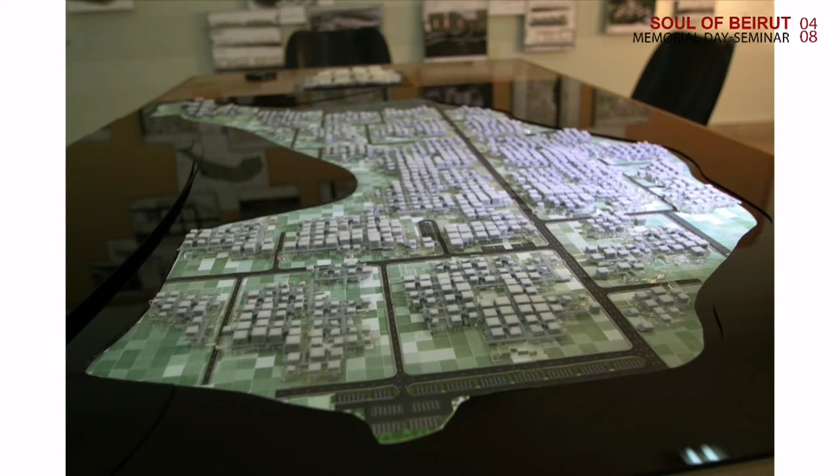Six years ago, when I looked like a baby, I graduated from the senior project that I carried out as the project of a lifetime, since it was so real by the time we were facing the Syrian refugee crisis that I so wanted it to be built. It was the catalyst that woke my awareness about the real meaning of architecture—that it's not about the physical object. Architecture is about human aspiration and the adaptive response to a need, in a way that the role of an architect is to be able to adapt a selfless architecture to any situation.

And it's so powerful that its impact has the ability to manifest itself to make a radical change. And of course, it has to be for everyone, for every single human being, and not just for rich people who actually have enough money to make great buildings. So time made me realize and taught me that this project isn't supposed to be tailored only for the refugees, because we live in a world that has never found peace ever since the history of mankind.

Humanity often faces incidents that disrupt lives, whether caused by natural disasters such as tsunamis, earthquakes, floods, etc., or man-made, such as war or refugee crises.

So one year ago, this is what happened to the port of Beirut. It disrupted the lives of many Lebanese people, and as a result, a total of 200,000 homes were affected by the blast, in which 3,000 were severely damaged. Also, 300,000 people were made homeless.

Some poor families literally had no place to stay. They were living in really bad conditions, and they didn't have access to the simplest aspects, much like what is needed for animals, and even less. Also, landlords who rented their homes using the old wage system have completely misplaced their tenants, as new wages are to be enforced upon restoration.

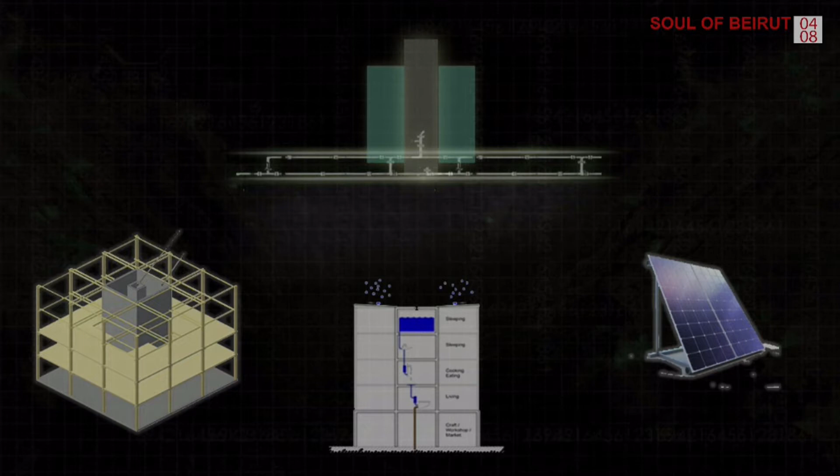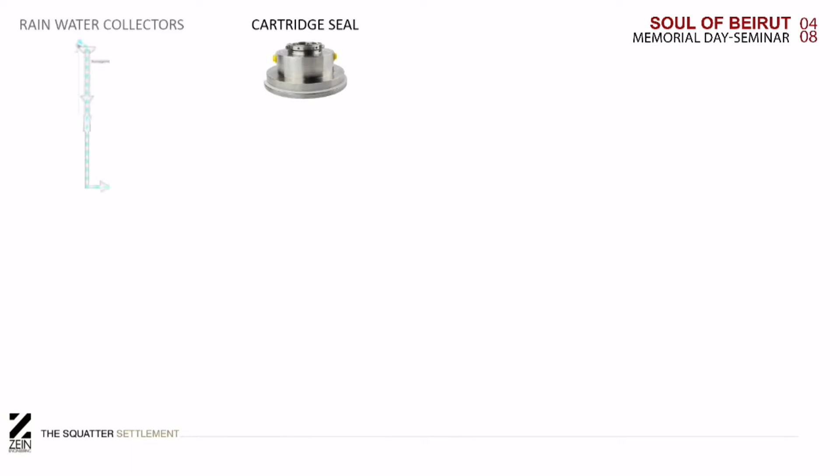So the core is the main shaft that contains all the services that the end user needs to create a self-sufficient settlement using natural energy resources. For instance, electricity is powered using PV panels alongside a small generator for backup. We're going to need a small cartridge seal, a rainwater collector to collect water from gravity, a water tank, a PRP, and of course, for the overall system, we need a treatment system.

So rainwater is collected by gravity and pumped up to the water tank and stored in a 10,000 liter water tank, then pumped back to the units, clean and drinkable. And of course, the cartridge will purify and clean the water.

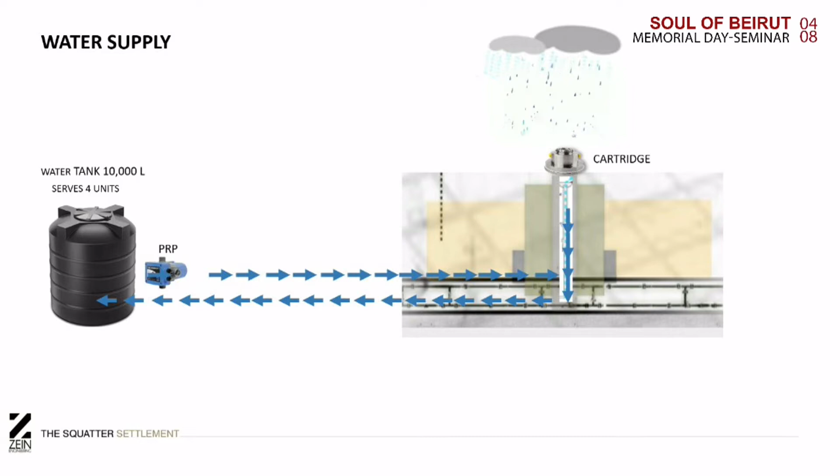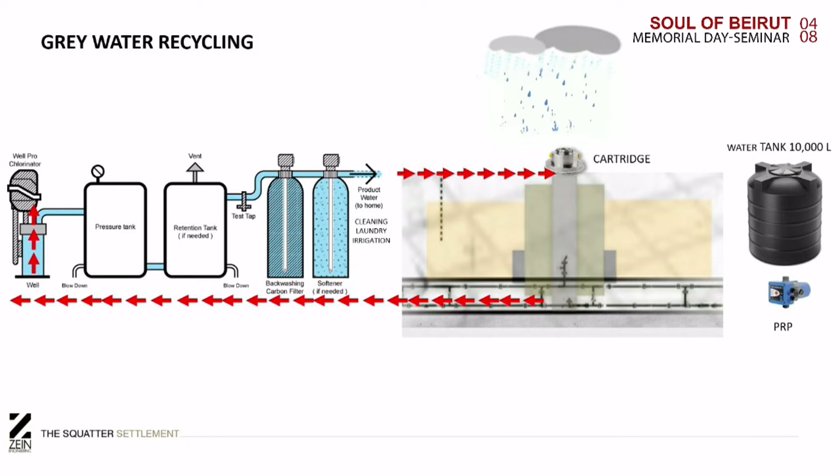Although sewage is constantly being recycled using an external treatment plant common for each couple of units, gray water makes its treatment cycle to become reusable for toilet water, for irrigation, for cleaning water, maybe laundry.

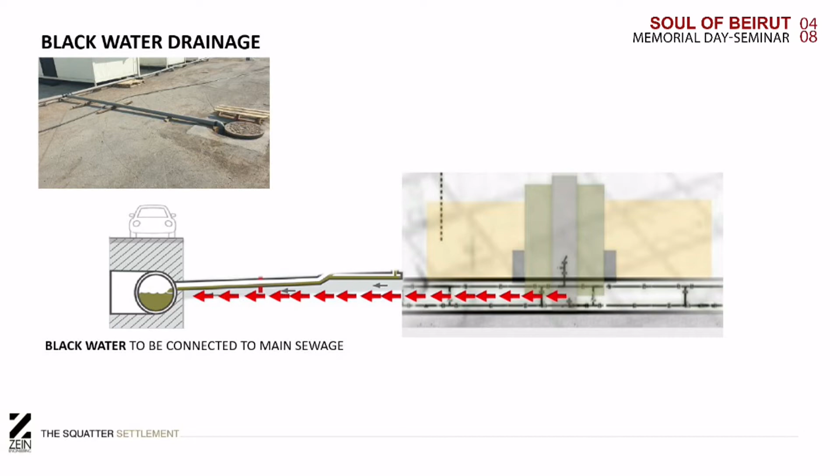As for the black water, it's either drained to an already existing sewage system, or if we don't find any existing sewage system, we can use a black tank where we can store and treat the black water. But of course, we have to regularly clean it.

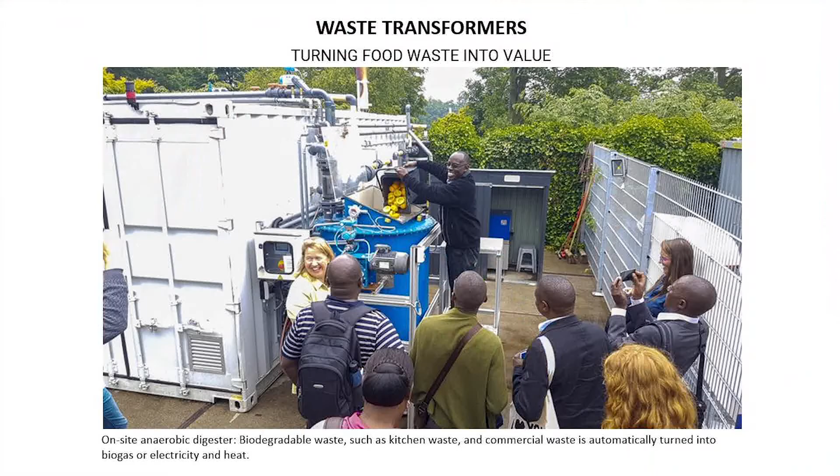And we have this on-site anaerobic digester that serves the whole settlement, so biodegradable waste and commercial waste is automatically turned into biogas, electricity, heat, and also fertilizer.

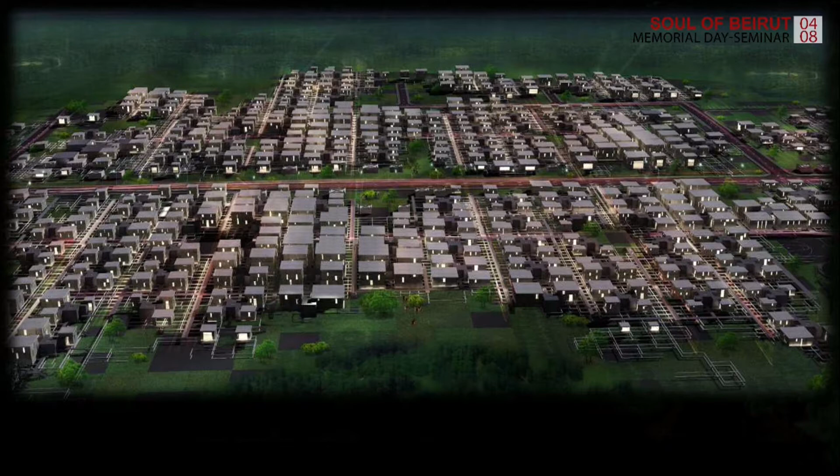And this system can be built anywhere in the world by adapting to its context. But of course, it also has some sort of aesthetical value here.

In Beirut, after the explosion, there was this voice in my head telling me that I should build this project for the people of Beirut who became homeless in their own country.

So first we had to identify the implementation area. The project must not be so far away from their neighborhoods, from their homes, so they can maintain their regular life and social functions.

And we targeted 3 types of family victims. First, we had the families that had their houses completely destroyed and unrepairable, and they needed a new place to stay permanently.

Some other families had their homes partially destroyed, and they're repairable, but they need a year or a couple of months to be repaired. So they needed a place to stay temporarily until they get back to their new homes after being fixed.

And third, we had families that were living under old lease systems, and they got ousted by their landlords, so they need a place to stay permanently.

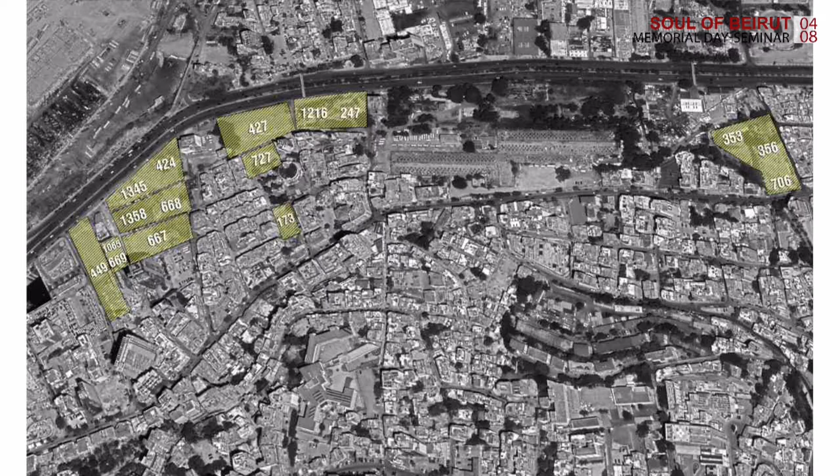So we identified the empty lands in the affected zone. These were privately owned, so it was really impossible for us to use them, as they're so expensive. Then we found a really interesting land owned by the municipality. I became really friends with them, but they didn't give me the land, so it's still stuck there, permanently.

So we built 16 houses that were supposed to fit inside a 2,000 square meter land, and we compacted it to fit inside a 1,600 square meter land. This project can reach 2-story levels, so instead of having 16 families, we can have 32 families inside that 1,600 square meter land.

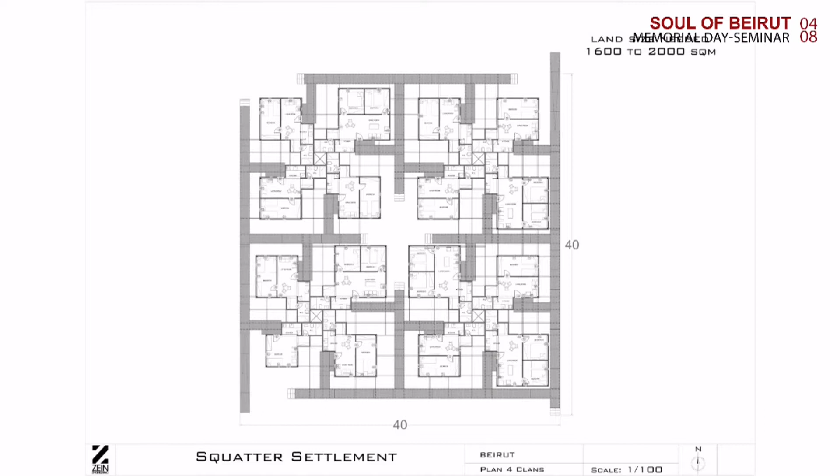Of course, the project can be dismantled in a matter of days, and the land will get back to its original state. So we did some executional drawings for the project.

As you can see here, we have different clans. Here we have open space, bedroom with the living room. Here we have partitions, with 1 bedroom, living and dining. Here we have 2 bedrooms, and of course we can reach 3 bedrooms.

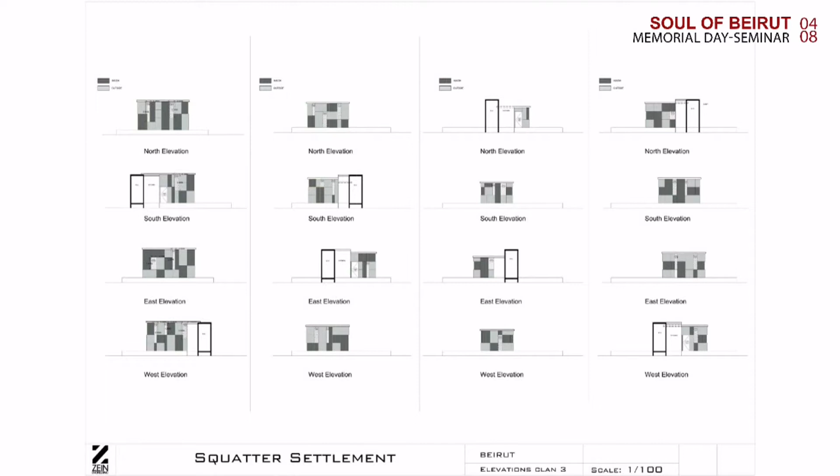There's this ideology that says living in a shelter is like living in a cottage, or something really ugly. So we designed the facade in a way to appear really elegant and attractive in its design, so people can live in beautiful architecture.

Essentially, the architecture is encoded in a way to be assembled and dismantled in a matter of days, so it does not really require much manpower.

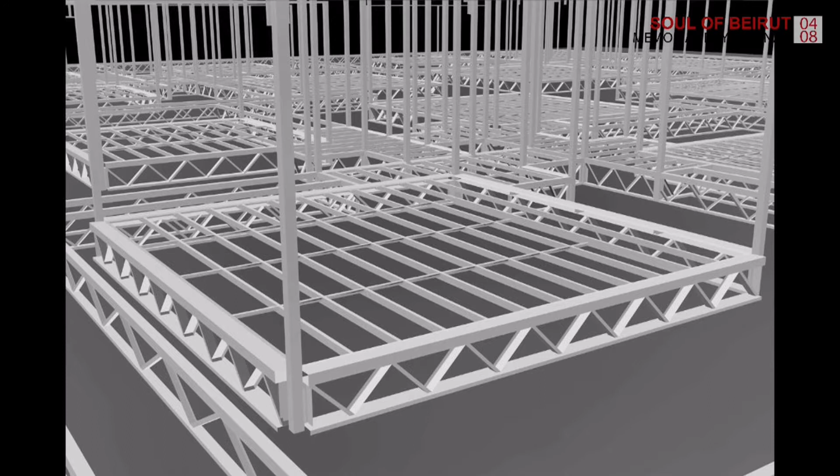These steel structures are lightweight, and the civil engineers designed them so that by connecting all these elements together, we come up with a robust and strong structure. We also uplifted the whole structure to make sure the infrastructure is preserved, and to protect the shelters from flooding as well.

As you can see here, we reserved tracks for the walls, the doors, and the windows. It's all encoded in a way that you build it like a puzzle. So this is the overall structure.

As you can see, we have catwalks. We need catwalks to arrive at their house. And as for the walls...

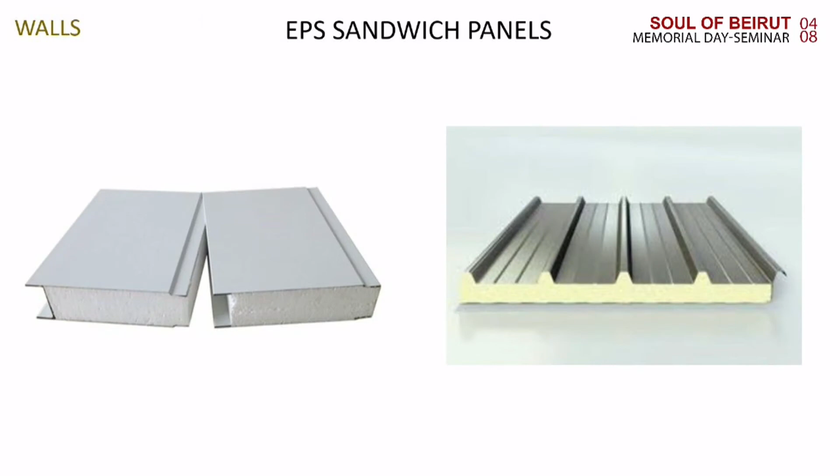As for the walls, we use these sandwich panels. These ones are used for the walls, and the right one here is used for the roof. What's really interesting about this material is that it's lightweighted, insulates perfectly, and it's cheap. It's an amazing material.

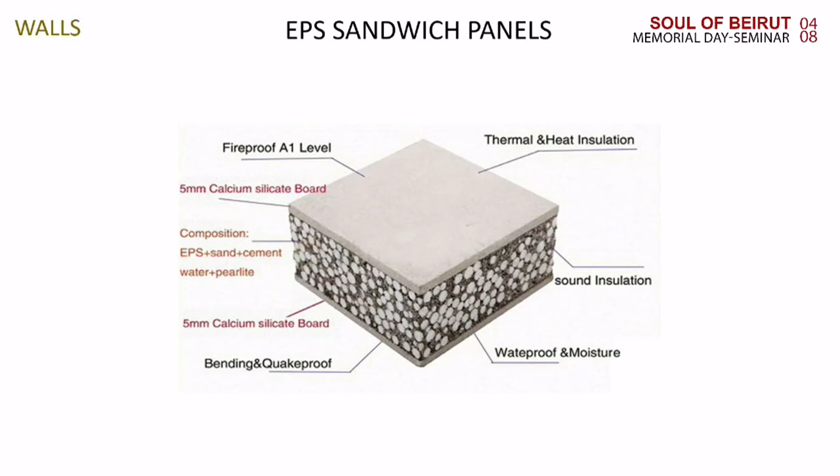And we used for the flooring, bamboo flooring and vinyl, since it's safe, durable, and eco-friendly. And for the furniture, we used reinforced paper panels.

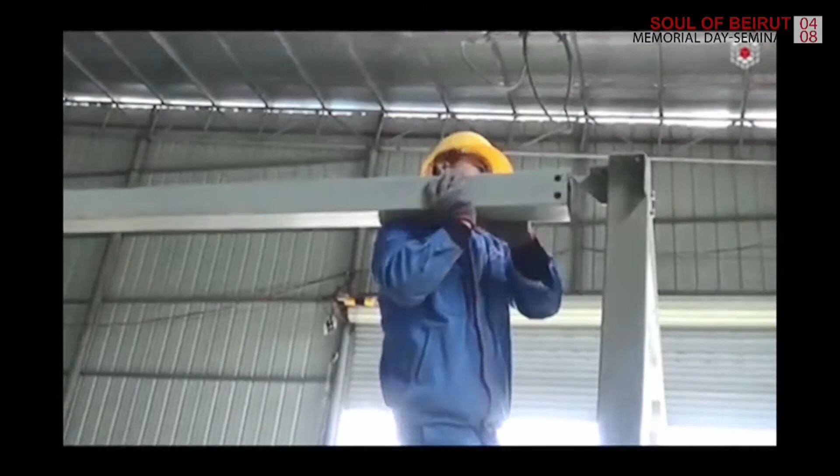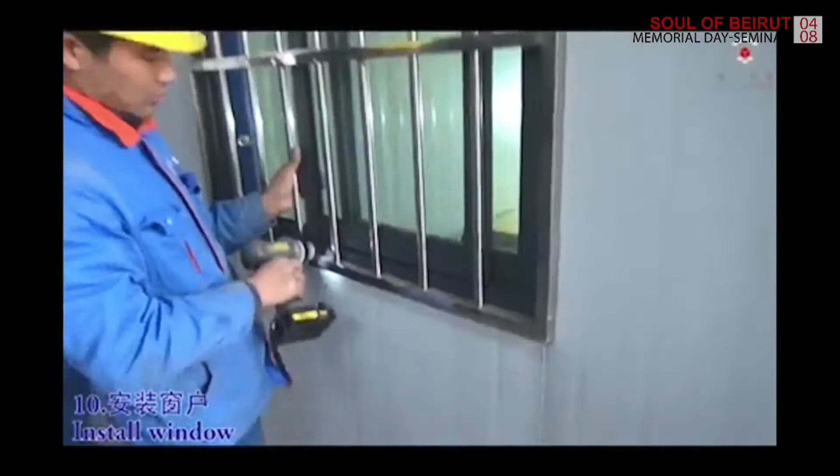So we need some tools and accessories and some bolts. By connecting all these elements together, we have the columns, the beams, and a place reserved for doors, and windows. We have the protections of the windows and the walls, and we need the roof, bamboo flooring, and of course some silicone and small materials, some tools.

There's this important phenomenon called schooling. This is where people learn easy techniques in a socially active manner. There will be corps of trained builders that will train others, and then the system will spread.

In the case of any emergency, like the one that happened a year ago, any person who learns this technique can build his own shelter. So it's a permanent temporality instead of a temporal permanence. People can stay in a temporal system permanently. They can be dismantled in a matter of days.

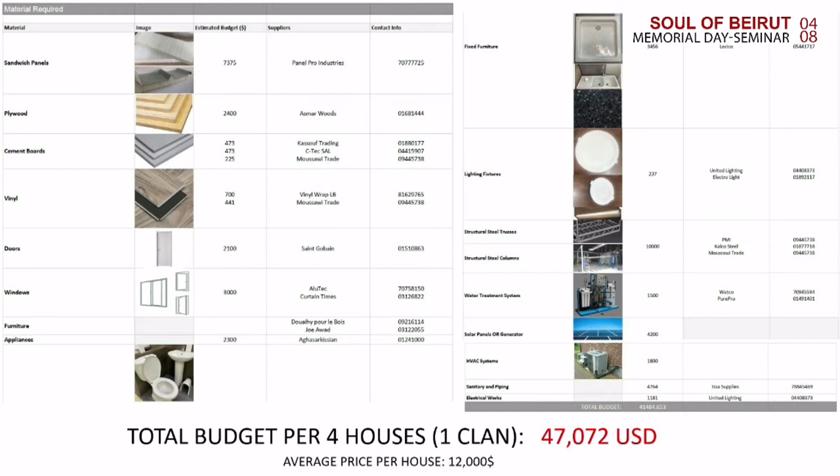We made an accurate BOQ. We stacked all the materials needed for this project, and it turned out that the budget per 4 houses will cost $47,000. So the average price per house is $12,000, which is negligible compared to how much a damaged house will cost and how much time it will take.

Some houses require a year or a year and a half to be repaired. So these people are staying a year and a half precarious. They have no place to stay. They don't have any home. That's why this project is needed.

What's really surprising is that it's not over. One year after the explosion, there are still families that are homeless, and they have no place to stay. This project is needed, it's a must.

So it's a permanent cycle. You might say $12,000 per house, but it's a one-time payment for a system that will be used enduringly. Whenever a crisis happens like this one, people squat the settlement as settlement squatters. When the crisis is over, they either stay permanently in the house, or they can dismantle it and store it so it can be reused again for another emergency. It's a never-ending cycle.

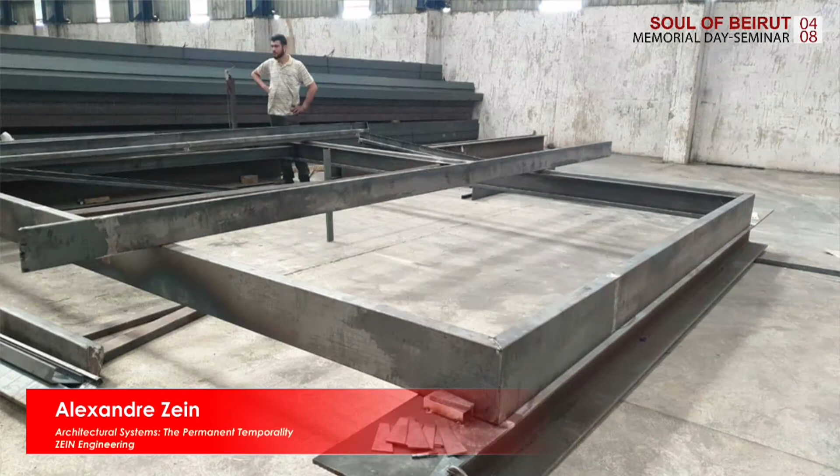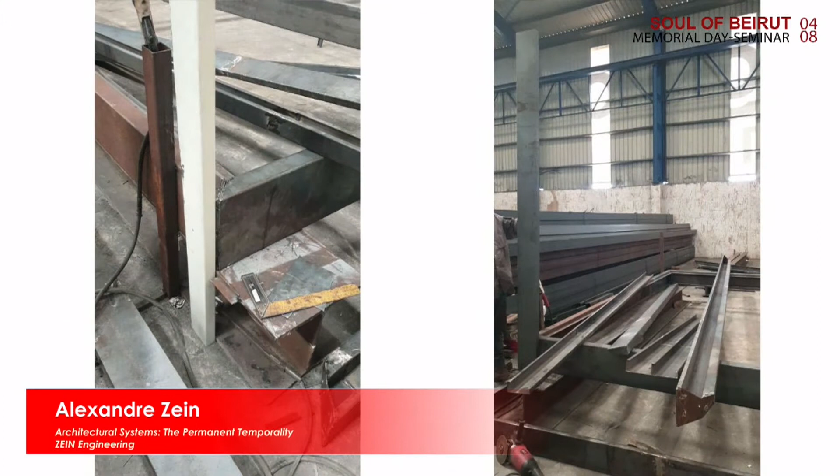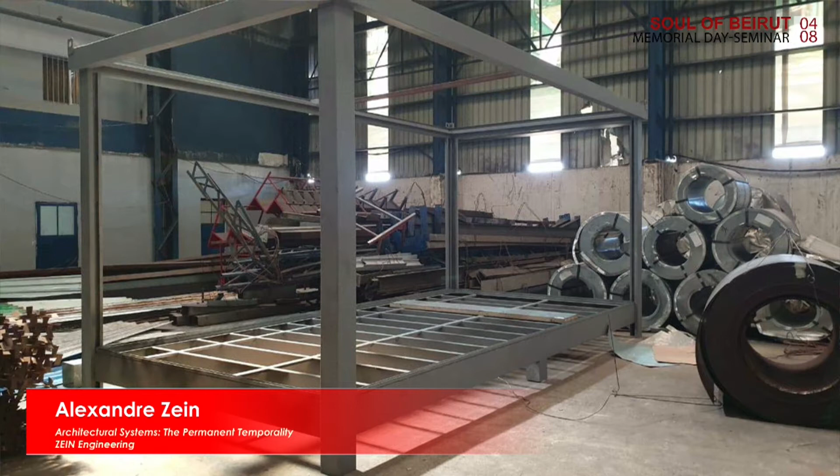Six years ago, I really wanted this project to be built, but I was a baby. A year ago, the explosion happened, and I felt the urge to build this project, but we didn't have the time, the money, the place, or this much support. It was short time. Well today, one year and one week after the explosion, we did it, and we built it, and it's right here in front of you.

But of course, it's not over. We're still redesigning, still working on the testing. It's still an ongoing process. This is just the beginning of the project of a lifetime.

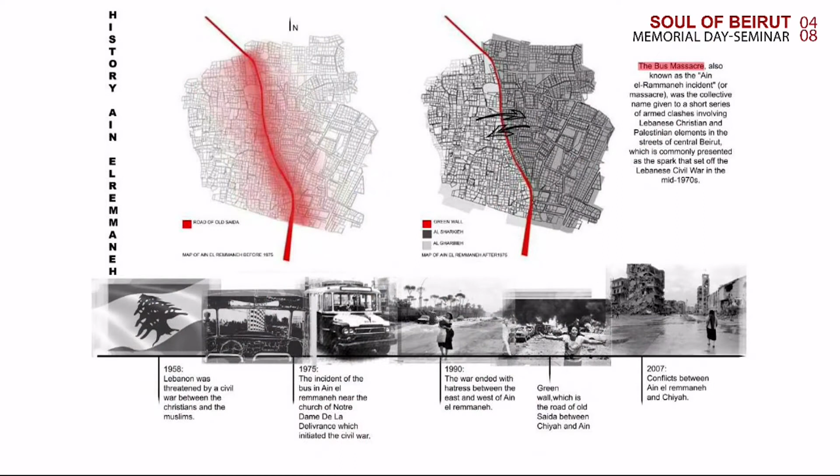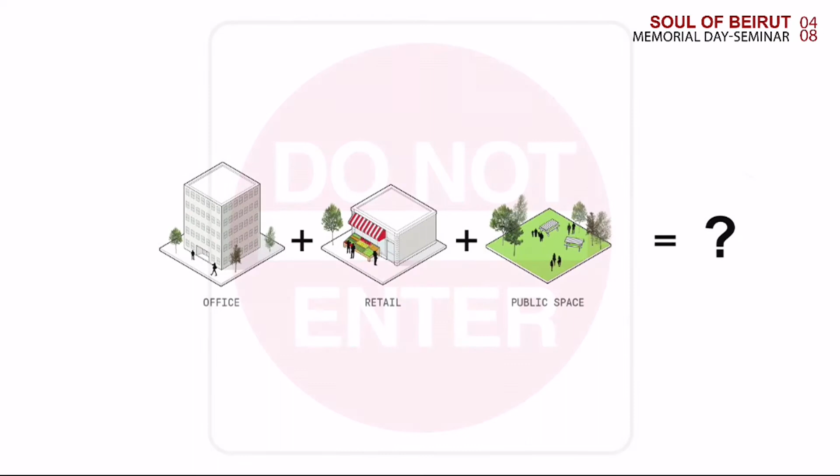So the area has nearly 2% greenery and a very high level of pollution, no public attraction, no public space. So this is the land here. And usually in Lebanon, private space always remained too private. So that's why we miraculously convinced the client to create some sort of public attraction by introducing retails and coffee shops on the ground floor and some offices on the first floor.

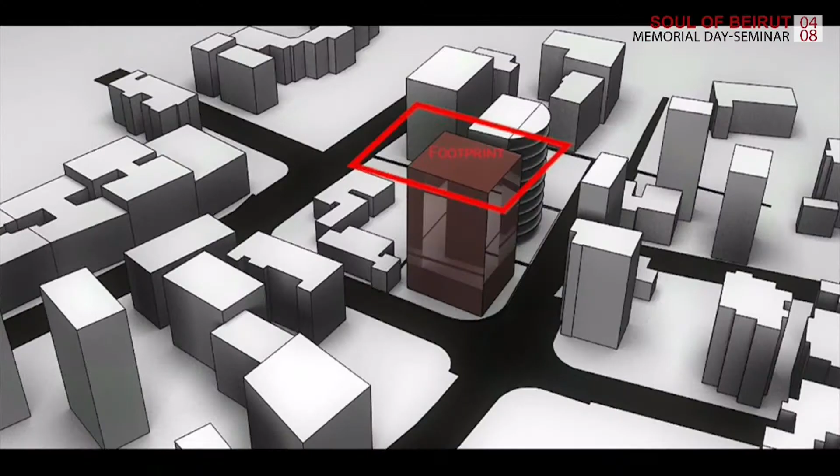So instead of taking the maximum footprint like all the investors do to fit as many apartments as they can, we brought the footprint to the minimum and went higher. By going higher, you can enjoy the amazing views of Beirut, and of course you can reserve a place for public attraction down here.

And then in order for us to retrospect the old unfinished structures of the area, we brought all the structural elements to the extremity to be part of the architectural design. Then in order to neutralize the exceeded exploitation, we subtracted parts of the nude slab to become part of the emotional facade.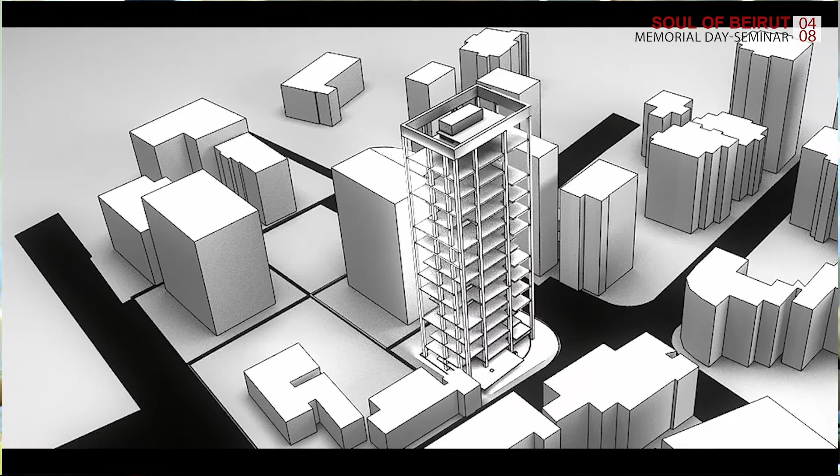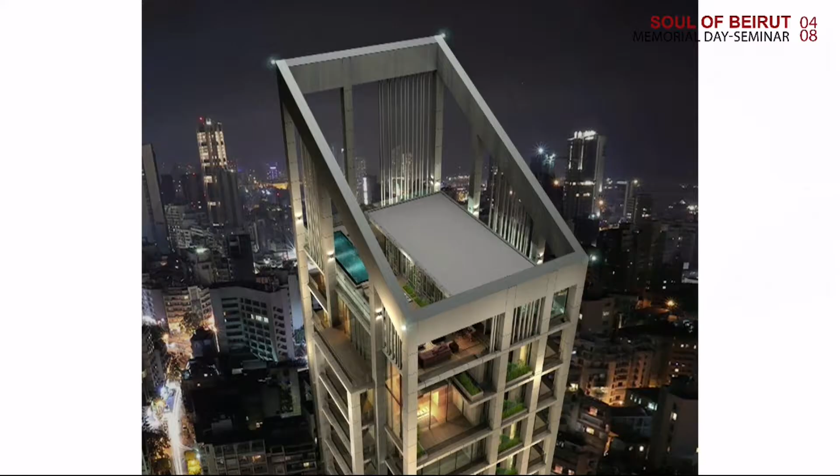And we planted it with micro algae so it could absorb the carbon. Then we uplifted and deviated the whole structure so it could remind us of the resilience of Ain El Mreisseh. So a simple rational building has greenery that surpasses 2% of the area, and it imposes itself as an inspiring landmark element that brings positivity to the context.

So we clad the structures with ACP panels so we can give it a strong character that would remind us of the period of our time. Then we recessed all the glazing system in a way that during summer, these nude slabs act as shading devices, while during winter, the sun can warm up the entire apartment.

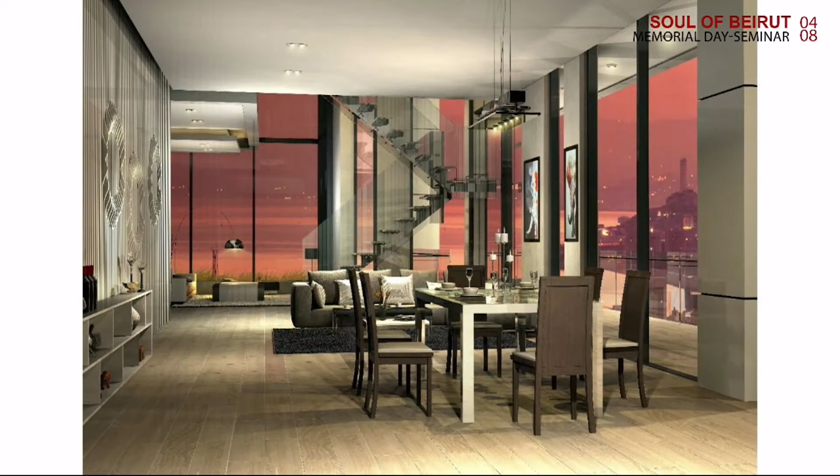So here you can see the connections from the inside of the apartment to the sea. You see how beautiful the Mediterranean Sea and Beirut are.

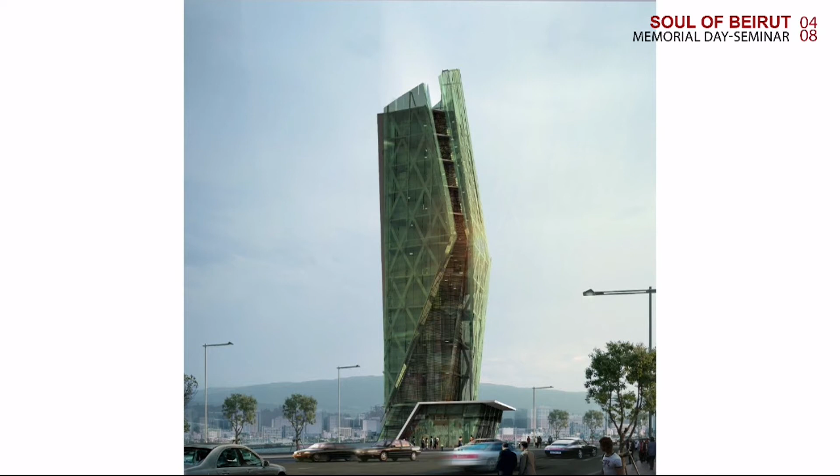Yet another project in Beirut, in Jdeideh - it was a client who wanted a glass tower. So it infused the street with a muscular skeleton element that is fighting gravity, and of course it has a dynamism around the street. There are double levels for the skin.

And then we have this bracing structure that is holding the whole structure. It hosts more than 100 offices and companies, and they all overlook the amazing silhouette of Beirut and the sea.

Well, from Beirut to the world, we're going to talk about some international projects. So we recently won the competition to design a residential complex for Renko, and we also obtained the most creative award for Land Complex. It was located in Riyadh, KSA, in a very high-end neighborhood on King Abdullah Street. So this is the land, 9,750 square meters.

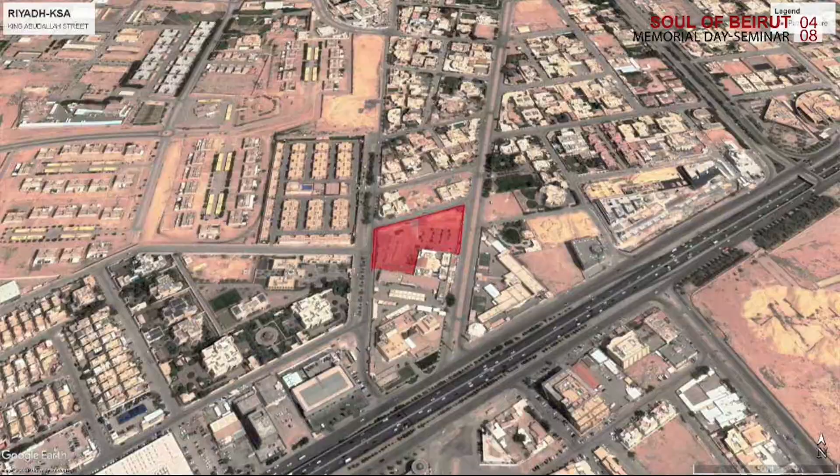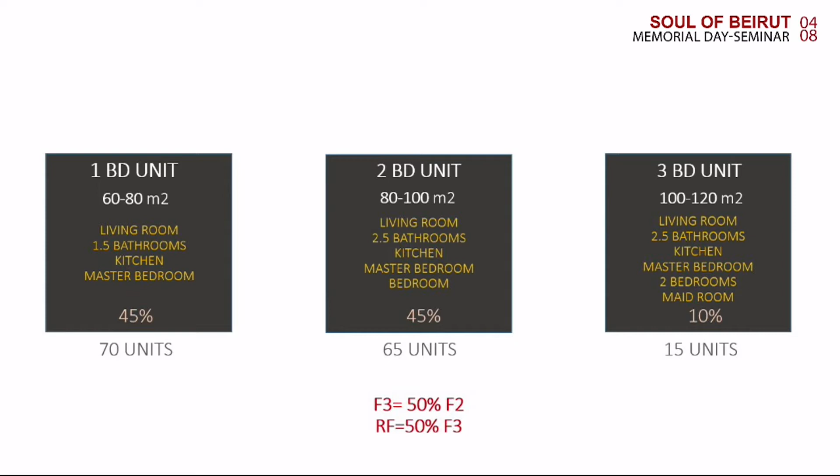So the challenge was to create a residential complex that maximizes the use of outdoor spaces in an area that avoids sun exposure, so the design is flexible in adaptive response to its context. The assignment was to design 150 apartments split into 3 types: 70 units for the 1-bedroom type, 65 units for the 2-bedroom type, and 15 units for the 3-bedroom type. And the regulation was roof shall be 50% of the third floor, and the third floor shall be 50% of the second.

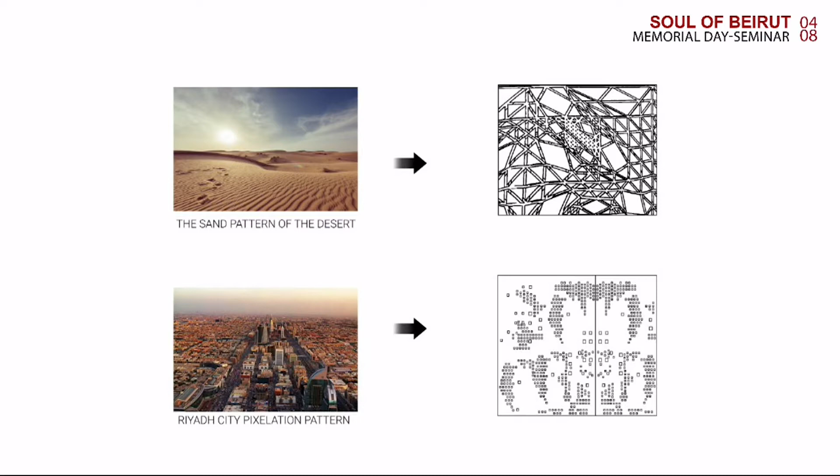So first we had to identify the DNA of the project. We got inspired by the sand pattern of the desert of KSA to create the main skin shield pattern here that will protect the overall project.

And then here we got inspired from Riyadh City's pixelation pattern, and we created this perforated skin shield for the apartments that will protect them from the intense sun rays and foster privacy among families. Then we simulated many forms, many pixelations that could be used for these apartments.

So the iteration of apartments acquires the same essential ingredients to create a superior protected living experience. Each unit acts as an organic cell that transforms its morphology according to tenants' needs, synchronizing with real-time environments. So we created all the types that we needed so we can just expand them.

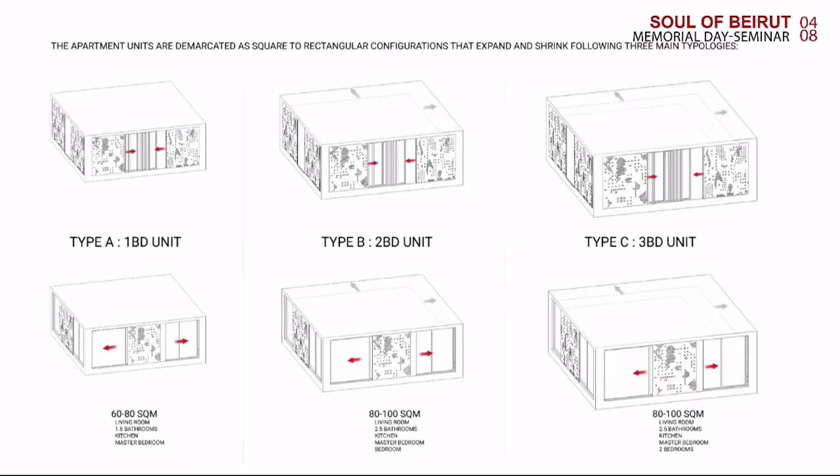So this perforated sliding skin shield transforms its location according to its orientation, almost like a nervous system that links between two otherwise separate environments. First, emanating from a modular grid, we created an infinity loop that reminds us of the infinity of the desert. And then we uplifted the southern side so we can protect the overall project.

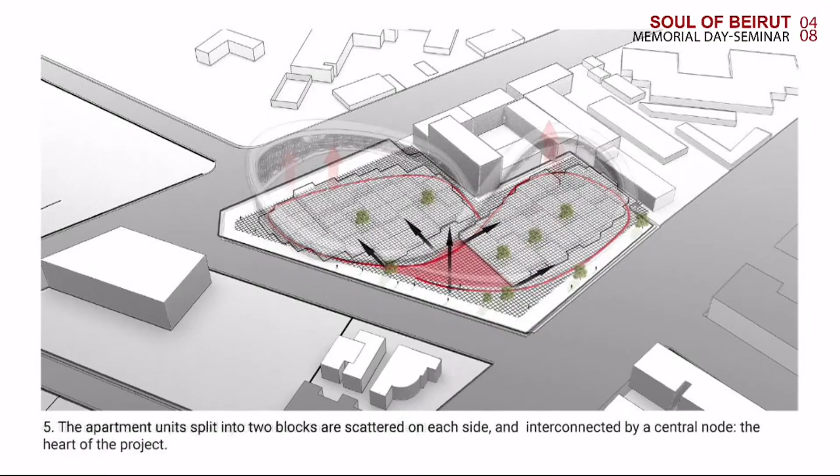So the southern side is the skin shield that reminds us of the desert of KSA. And then the intersection was reserved that will connect the overall project together, the private and the common spaces.

And then in the ground floor, we took the maximum footprint. We needed to fit as much apartments in the ground floor as possible. And then we created some courtyards, like 8 by 8, to make sure that every apartment will receive enough daylight. And then, of course, we change with the heights.

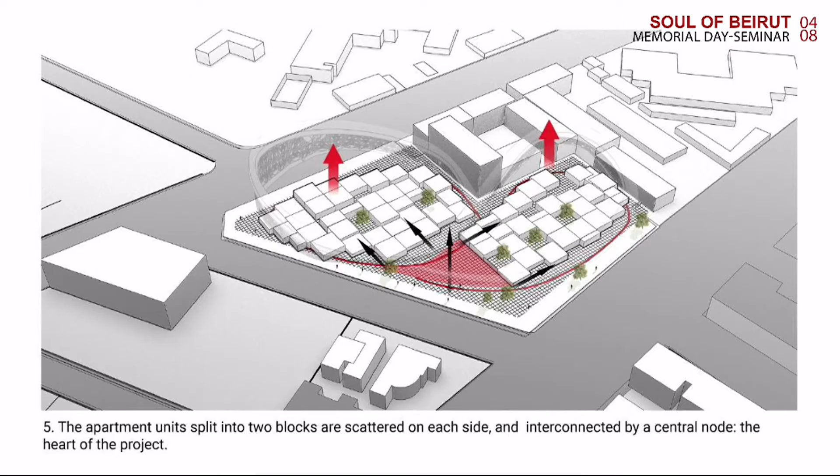And then by mingling all these apartments together, it cascades up to reach 150 apartments. And they all enjoy the amazing views of Riyadh. And each apartment has its own garden.

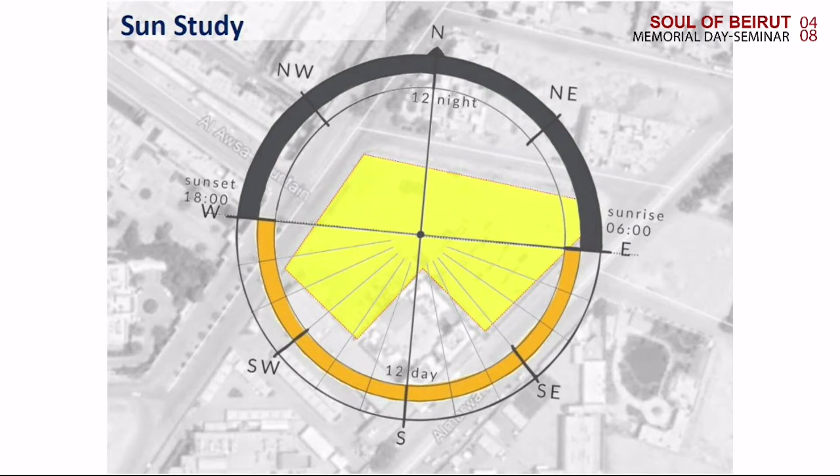So we had to study the sun path to make sure that the skin shield will perfectly protect all the apartments. And then this cascading movement will cast shades directly to the gardens in a way that people can, during all times of the day, spend time outside in the shades.

And then, as you know, in Riyadh, sometimes the wind is sandy. So that's why this skin shield distills and filters the sandy wind, and we ensured a natural ventilation.

And as you can see in the node here, we connect the overall spaces. So we have the private, and you have the recreational and common spaces. And then we designed the corridors to be dynamic instead of being just linear.

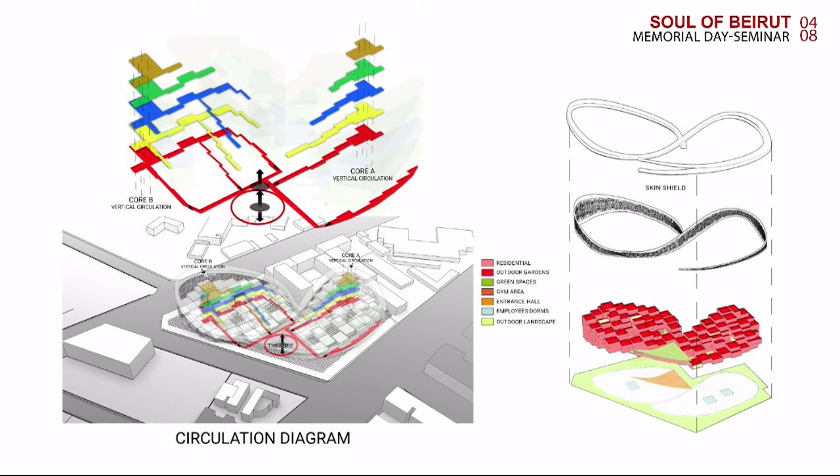This is the city. And of course, we planted all the apartments that all have gardens. And you can see the infinity shape. And of course, the main skin shield that gives the desert pattern.

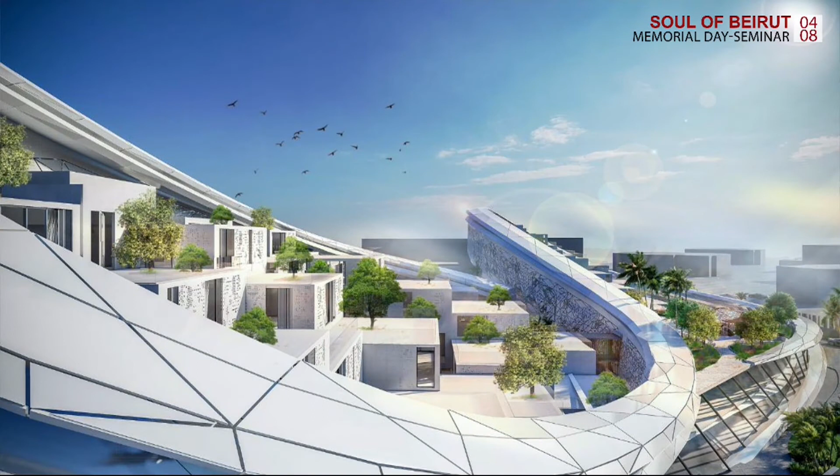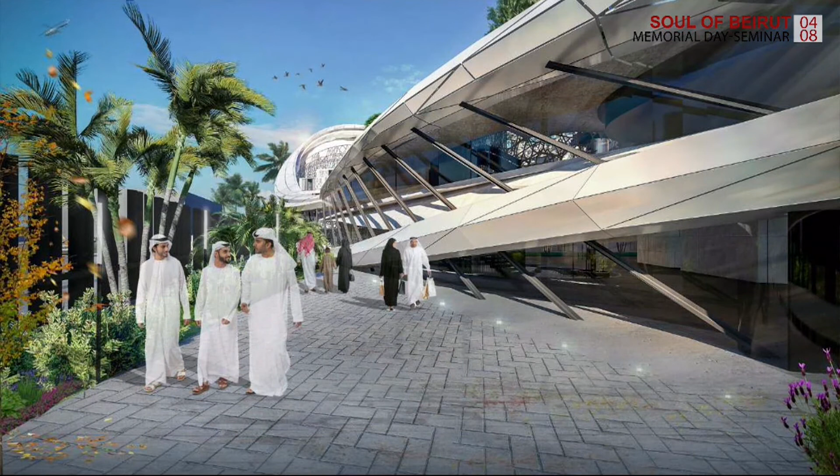And here we have the common spaces where people can meet and swim and spend some time outside, overlooking the mingled apartments. And of course, in the ground floor, we have the recreational spaces where people can walk and spend some time there.

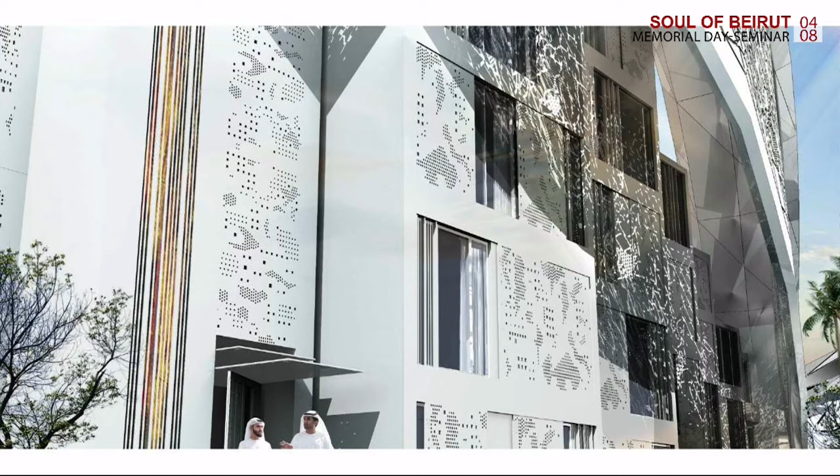And here you can see how the skin shield casts shades within the apartments in a way that gives it this image of a desert.

So in the basements, we had the parkings. In the basement one, we had all the recreational areas in the courtyards. So we had spa, we had pool, we had kindergarten, we had theaters, and many more.

In the ground floor, we had the lobby in the middle, and here you can see that dynamic corridors and the courtyards. So this is the lobby.

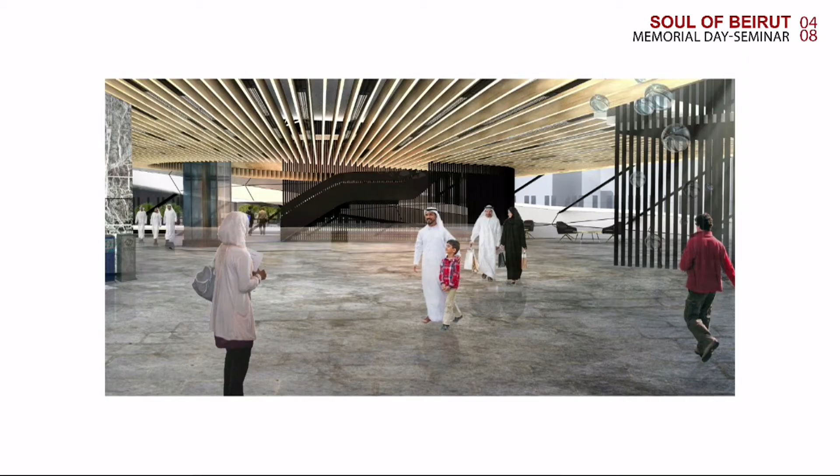And here on the first floor, we created the gym in a way that you're sitting in your apartment, you walk 10 steps, you'll be at the gym. And same for the sky garden created here in the main connections. And then it cascades up to reach 150 apartments.

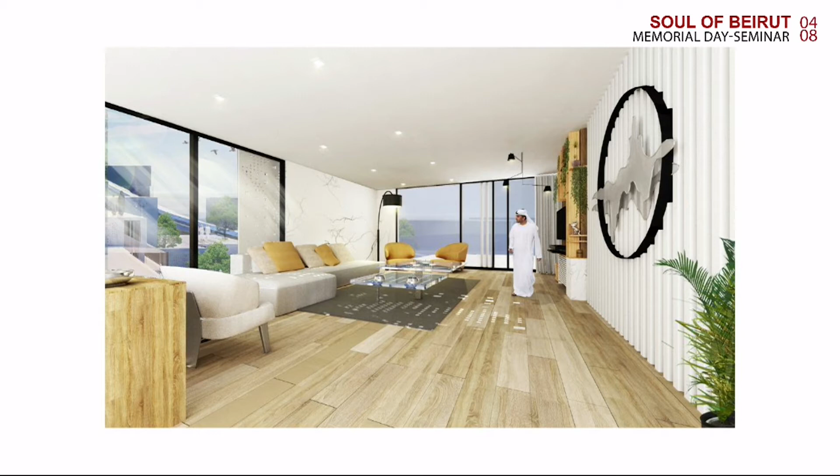So the end user has the flexibility and liberty to open and close these panels during all times of the day. So we can have faultless transparency during sun absence, or we can have considerable isolation during sun presence.

And when the sun is present, it casts shades within the apartment in a very dynamic way, as you can see here. So these were the sections.

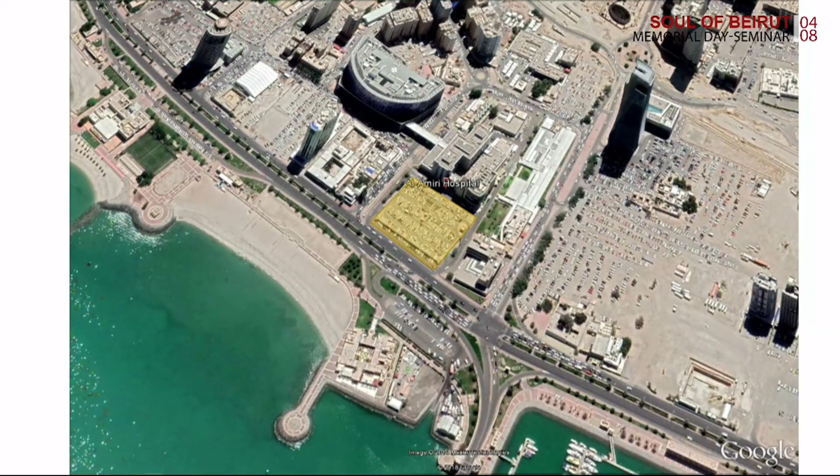Moving from KSA to Kuwait, this is another competition we won in Kuwait City. It was located in an old parking lot that once used to be a government hospital called Al Amiri Hospital. It was torn down in the 1970s.

So the aim was to revitalize the place that once used to be a public destination for medical services. So we were asked to create a greenhouse on its top without mislaying its actual function, which is the parking lot.

So we thought that instead of keeping the same structure as it is and trying to establish a public destination that does not actually blend with the parking lot, we brought all the structural elements of the parking to the underground, leaving the ground level freely open to the vibrant city in a way that the greenhouse and the public will be mixed together under one canopy.

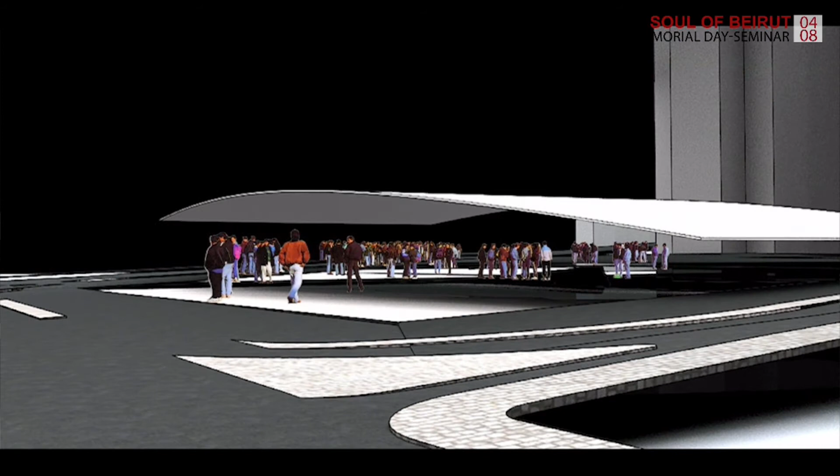So in that sense, a microclimate shall be created inside these spaces that are leveraging the connections to the city. So we got inspired from a plant cell.

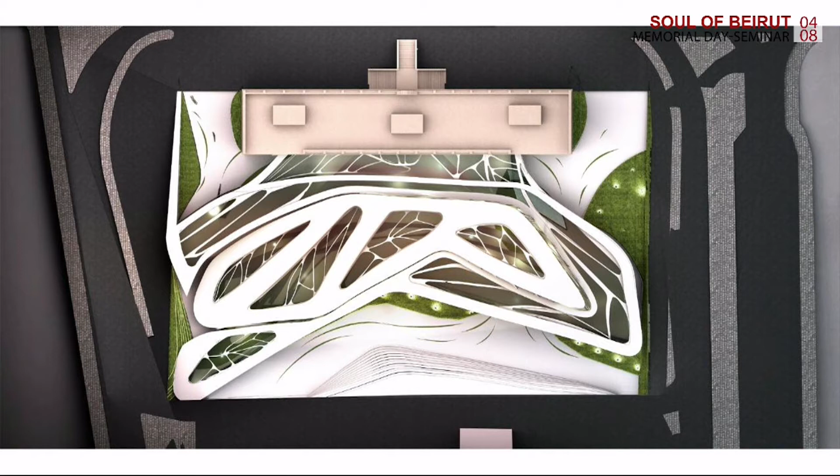So the future projects itself from the old arches, creating some sort of contrast between the old and the new. And the perforated canopy creates shades to the pedestrian from one hand and direct sun to the plants from another. So we didn't use glass, of course.

We used high-strength polymer, ETFE, which is 1% the weight of double glazing. So this material adapts well and perfectly to the high temperatures of Kuwait. So this is the project.

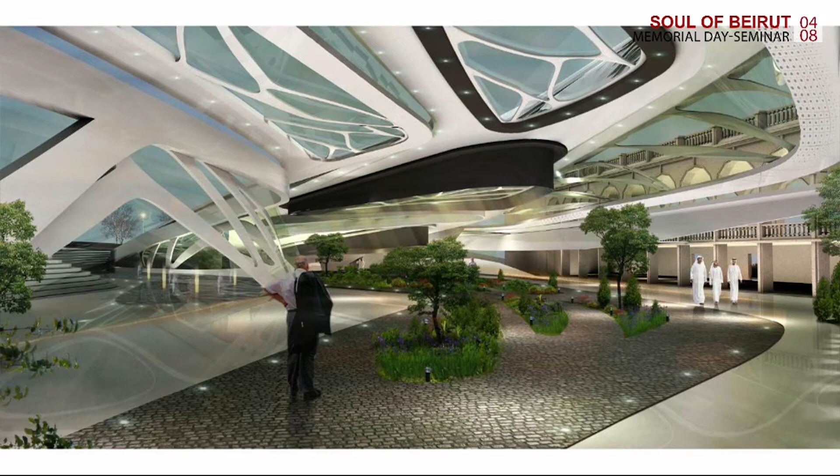So the metabolism of the project provides the end user with a natural microenvironment and delicate spaces, in a way that people can meet and walk and sit amidst thousands of trees and plants, and they're going to be healthy, happy, and comfortable.

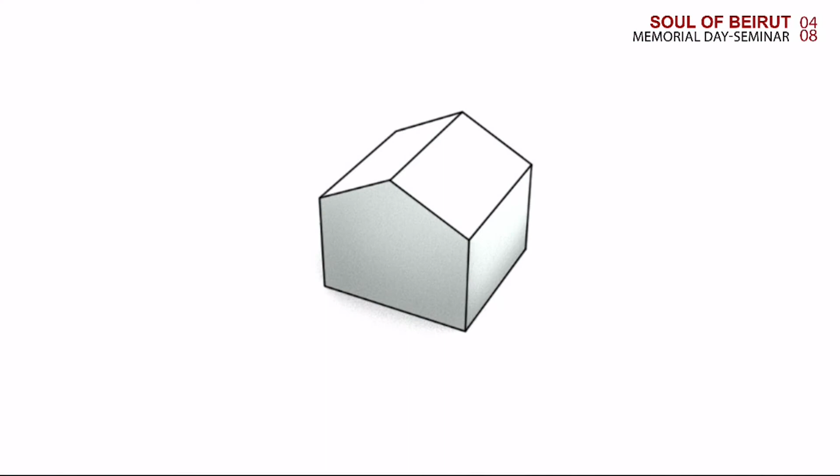So the built structure is a fresh reminiscence of the Chinese sharply curving roof, that was once modified in Korea into a gently sloping sharp angle roof with strong lines and steep planes, inheriting some kind of quiet inner harmony and exhibiting naturalistic tendencies with avoidance of excesses. So we created this Korean house, and then we divided it into 3 lofts, in which the biggest one is for the owner and 2 for rentals.

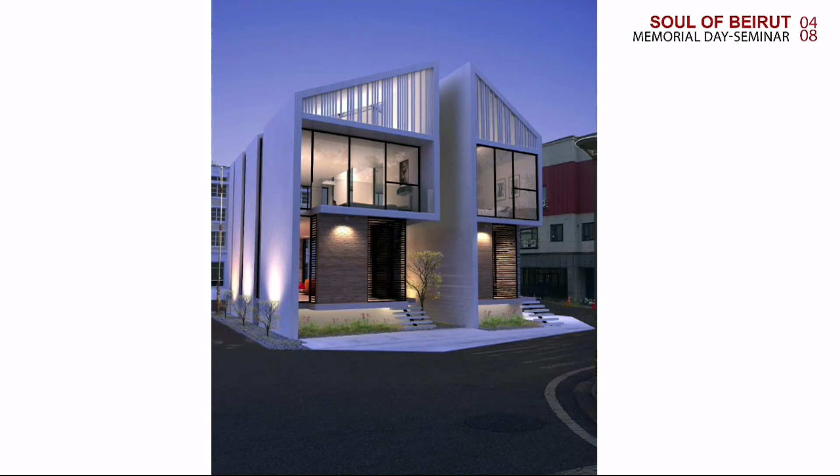And then we perforated it for sun access, and the negative spaces were reserved as a walkyard, as a technicality. And then we created the floors. We avoided the excesses by creating a pure form, a pure white material, but of course we enhanced transparency - that's really important. And then we attempted to respect the surrounding context, but at the same time it has some sort of bold and audacious attitude compared to its surroundings.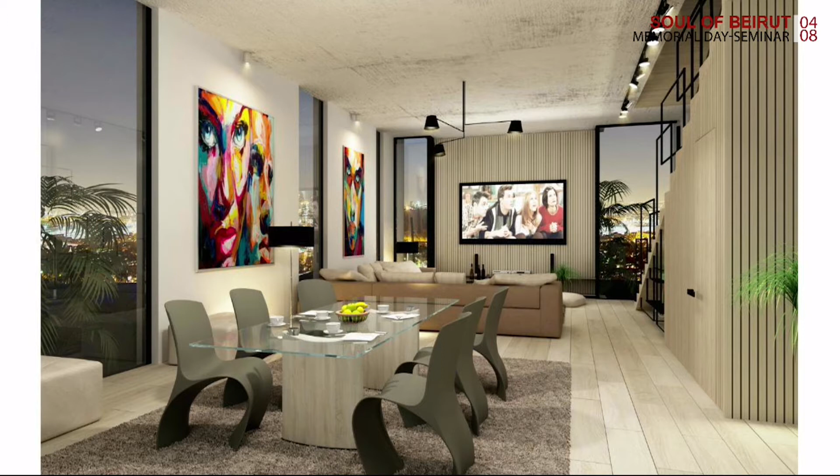So architecture is really about the place and the people you're building for. It has the ability to affect, to manifest, whether through spaces like this, through a building, or maybe through a swan.

So we designed the guidelines, and we invited nature to do the rest of the work. We just created the pathways, the lighting fixtures, and then nature grows itself and creates the peaceful spaces in a way that people can feel like in heaven. And we also created some art so we could remind us of where we are - yes, we are in Lebanon.

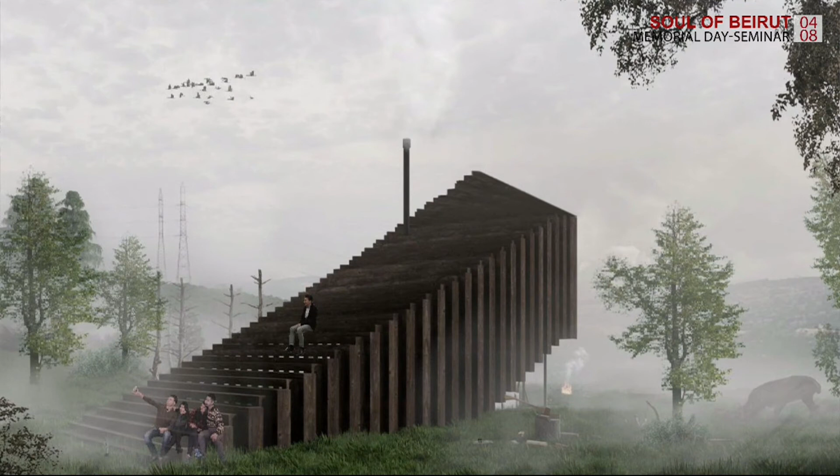And we also extracted stones while excavating, and we used them for cladding and for levelings. So it transforms with the change of season. So another small project in the middle of the Lebanese mountains.

This house is a soul-meditating body situated far away from societies and the bustling urban assemblies, surrounded by mountainous topography and dense vegetation. It offers a way of life in tune with nature.

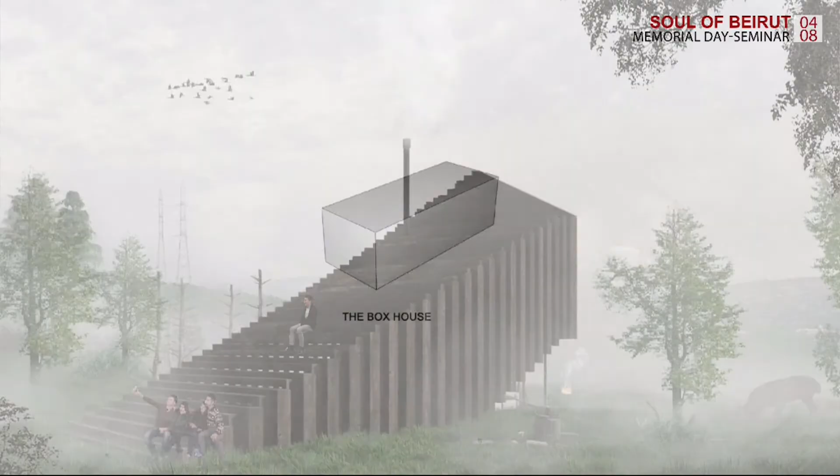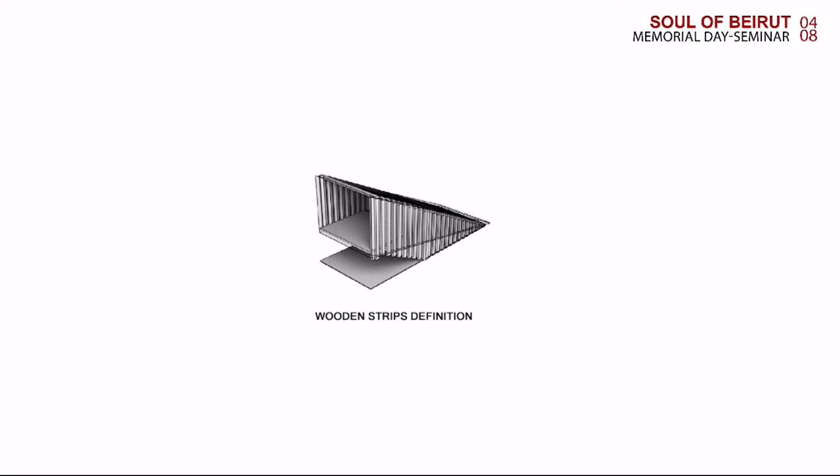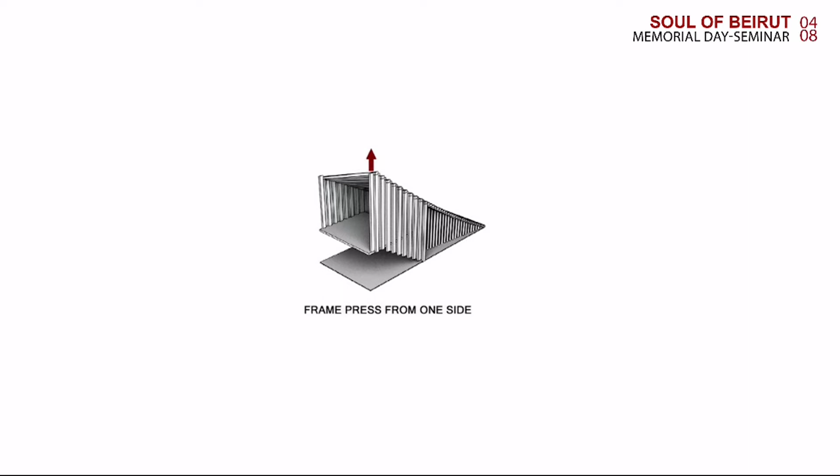So the volume of the house is a perched element detaching itself subtly from the ground to overlook the infinite sky, and this ascending movement is designated by an accessible stairway that connects to the facade directly. And then we press the facade to define the entrance, and we deviate the right corner to give it a different character, and we enhance transparency again.

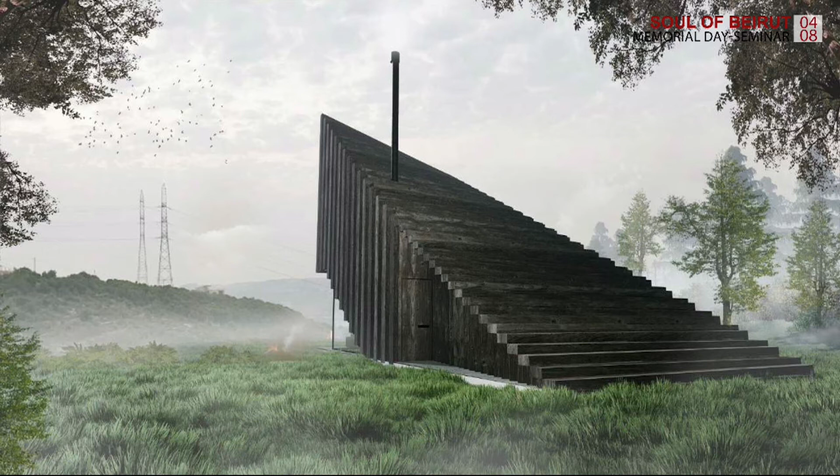So we sourced from nature the essential wooden material so we can minimize as much as possible the environmental impact of the project. So through energy efficiency, eco-friendly material, and a plain harmony with the surrounding, the architecture aims to conserve the biodiversity of the area and become a part of nature.

So here you can see that when you're inside, you can sense like you're in nature. You can smell nature, you can hear the sounds of birds and insects.

We've also had the chance to design studio sets for TV shows. These are projects that can go very quickly - in a course of few months, you can design the project and then build it.

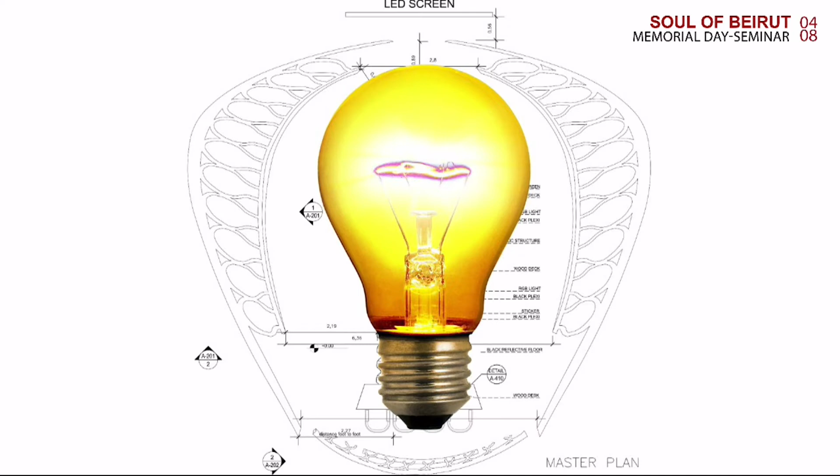So we introduced this tungsten lamp as the main platform. Down here is the jury table that represents the electrical pulse that evaluates the ideas, and then we have an LED screen up there. On the left and right we had these wings with multiple dispersed lamps that represent the variety of ideas. And then we doubled the amount of the scene by creating a black reflective floor. So this was the rendering, and this is a real photo. Of course, we used styrofoam for the wings, it affects well with the lights.

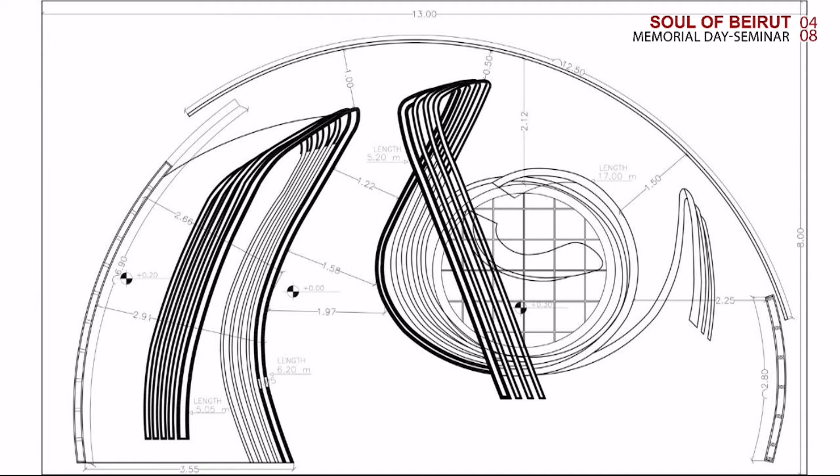And then in the same year, we were lucky to win the high-ranked comedy talk show competition, Lahon w Bas. It was conceived within 3 parameters.

First, we had this slant window that overlooks the city. On the left we have the band, defined by 5 migrating black strips that climb up to reach endlessness. In the middle we had the host, defined by a swirling element, defined by 4 migrating black strips that climb up to reach infinity. So after 3 years, we became the exclusive designers of the show.

When I was asked to design the new set for the 5th and 6th season, before I do that I used to spend some time with them, with the colleagues, with crew members. We used to drink alcohol because they drink alcohol before they go live, so I used to drink with them. So when they asked me to design the new studio, I brought them a gift, a weed leaf.

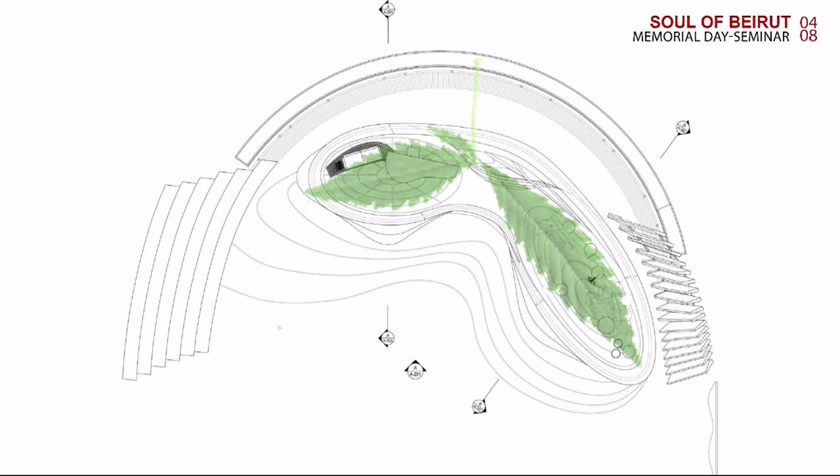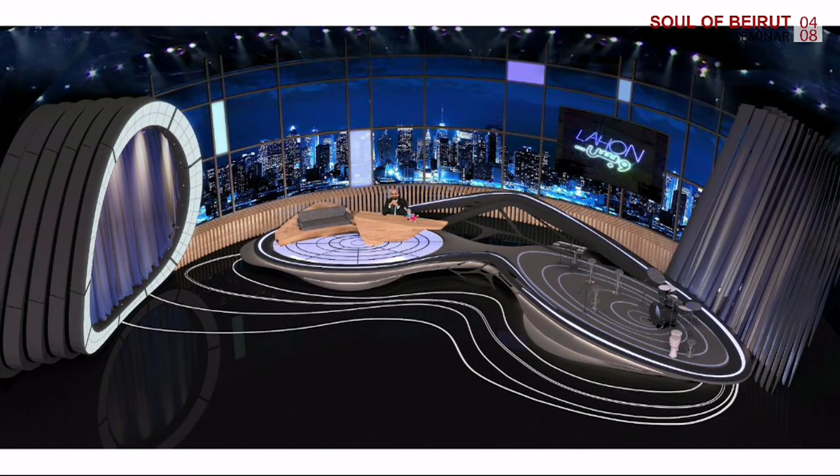So I thought to myself, why don't I just introduce this weed leaf as the main platform? We created the main platform that looks like a weed leaf, with this sort of gentle movement of curves. On the right we have the band, and on the left we have the host connected with the guest. The design carries a bluish tone to make people feel like home, and we have these framed windows overlooking the black and blue city background. So this was the rendering, and this is a real photo.

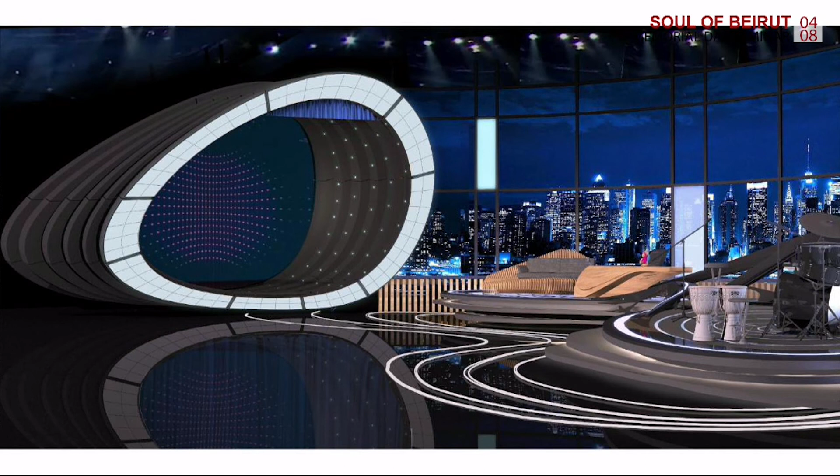We designed an access performance stage where every guest would enter from here. On the right, on the band's background, we created these rotating, swirling wooden stripes. So the overall design gives a late-night show atmosphere.

Also at LBCI, they wanted to refurbish the studios, but they had literally no spaces to build any new studio. They wanted to build 3 new studios, but they had no space. So I suggested that instead of designing 3 different studios in 3 different areas, why don't we just design 3 studios in 1 area by using the same base code, just changing the graphics?

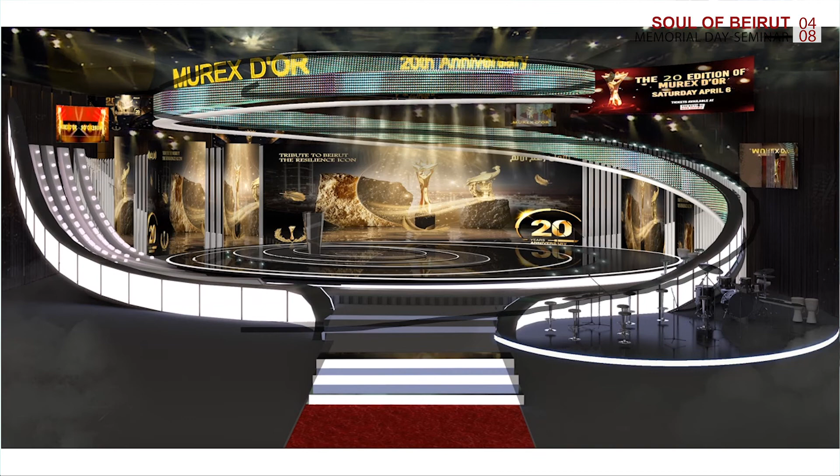So first, we got inspired from the incidents and events that happened a year ago. We took the Silos building as a shield, the shockwave helix, and the flying debris. We extrapolated the helix from the explosion and embedded it in the stage in a way that the background will be the Silos building as a shield, surrounded by all these elements flying around it, dispersed, just like flying debris.

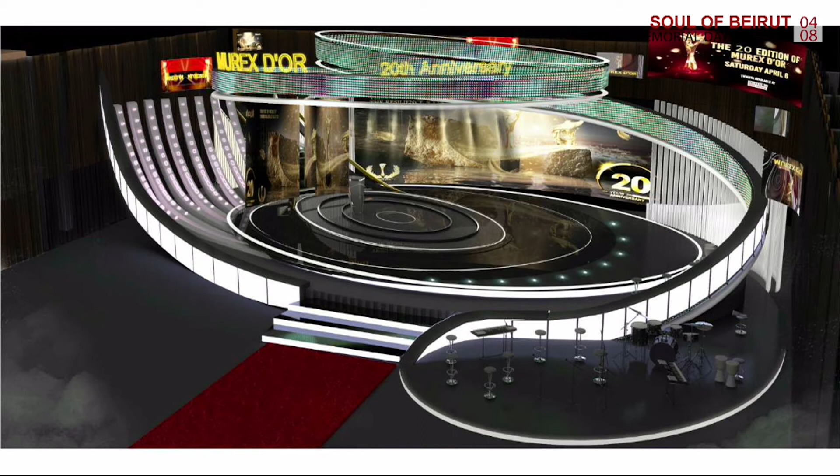So the stage connects spiritually to Beirut, but at the same time the show needs to be luxurious, needs to be elegant. But unfortunately, we had to abort this project because the Mikati family was looking for somebody to build this for free, and it doesn't work that way these days. So they had to do something really simpler.

So the imagined virtual can actually become concrete reality. Architecture really has the power to affect, to manipulate, to transform, to change, and to be there for people, to change people's lives. Because everyone, means everyone, deserves a clean and dignified place to live and be happy. Thank you very much.